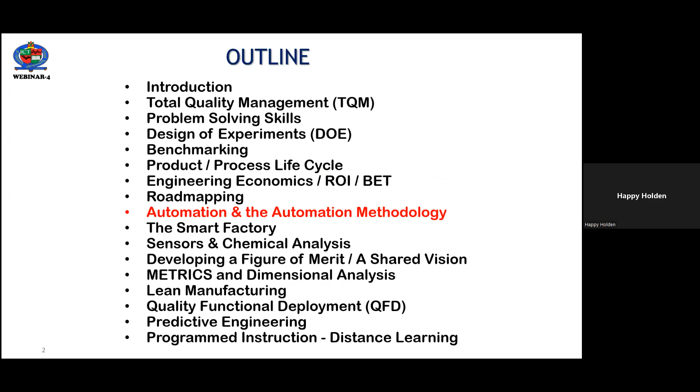Like I said, this is the 4th in our series, Automation and the Automation Methodology. This comes from the other ebook I asked you to download, Automation and Advanced Procedures in PCB Fabrication, from the 007 library, which is again free, as well as the other ebooks that we kind of use as reference for this presentation. Today I'm going to start a lot of what we call computer integrated manufacturing, because that's where I developed the automation planning methodology in terms of these 6 topics.

I want to start with the Computer and Automated System Association, CASA wheel. This was produced by SME in 1981. And if you look at that, this could be the logo for Factory 4.0, Industry 4.0, because this is what automation is all about.

Factory information, product and processes, manufacturing planning and control, being driven by strategic planning, finance, management, and marketing. But like I said, this is over 40 years old, and probably was developed before some of you may have even been born.

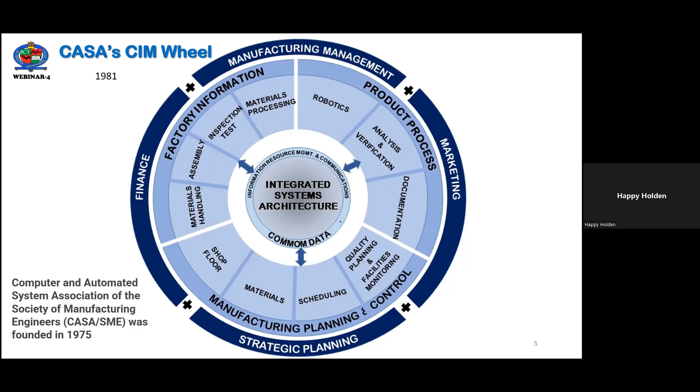The CASA part of SME was founded in 1975. Core to their computer integrated manufacturing are these 7 areas: computer-aided design, group technology, manufacturing planning and control, automated material handling, computer-aided manufacturing, robotics, and computing technology. You're probably familiar with many of them, probably not group technology.

Group technology is quite important, but somehow doesn't show up so much in this Factory 4.0, even though it's fundamental to product planning and automation. As head of the application organization in Hewlett-Packard, where we were helping companies plan their automation, group technology is a key contributor.

I spent many hours at Caterpillar Tractor and John Deere, who have some of the world's most advanced group technology, helping them implement these databases from a design methodology, because they found out that 80% of the time they were designing parts that they had already designed but had no way of knowing. By having a group technology methodology, before they started ever designing a new part or a product, they would look and see if they developed it before, and lo and behold, they may have designed it 6 times, and so they just activated the most cost-efficient, highest quality one, and the design was finished. It's very, very powerful technology, but one that you don't see talked about too much today.

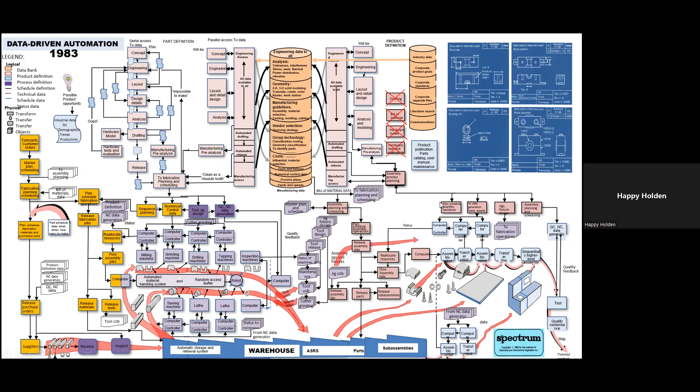But I just thought I'd throw that in to see if your eyesight's okay.

The Factory 4.0, which came out in Germany in 2012, it's been 52 years, and really nothing has changed but the buzzwords, and especially the costs. It still comes down to business fundamentals, common sense, and planning, but it's cheaper now, and you have more competition and choices.

Interesting enough, since they came up with Factory 4.0, which they tried to tell everybody was brand new, they went and changed all of the buzzwords that we had in the 80s.

So CIM evolution then became the digital factory, digitization in the cloud. The computer integrated manufacturing hierarchy became a multi-layer functional hierarchy. CIM and CAM architectures replaced with ISA-95 architecture. CIM connectivity, which 40 years ago was RS-422 or 232, now becomes Ethernet, Internet of Things, and 5G wireless type.

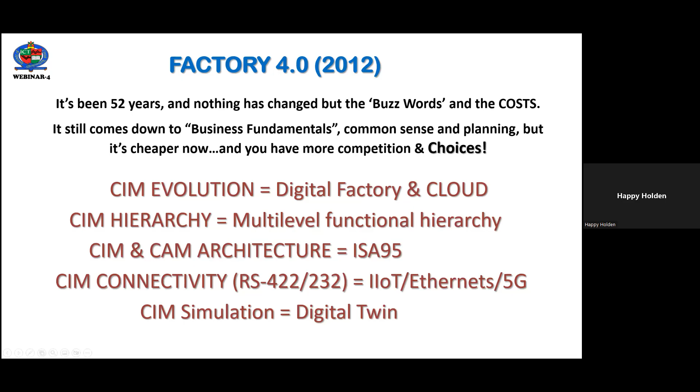And CIM simulation, which was a particular area that I focus on, now is called digital twin, interesting enough. But if you're wondering about digital twin, look up CIM simulation and software that's already existed for the last 10, 20, 30, or 40 years.

But the whole CIM process is the same as the smart factory process. It starts with planning and business planning from a strategic point of view, and then moves down through until you get to the tactical area.

If you don't do it yourself, there's management consultants, manufacturing consultants, technology consultants, automation consultants, and then the particular vendors that sell the products.

One that you may have a hard time finding is an automation consultant that knows anything about printed circuit fabrication or printed circuit assembly and box build. Which is why I emphasize that in many ways, if you take a good process engineer or product engineer in your company, it's easier to teach them the fundamentals of automation and automation planning than it is to try to find the right kind of automation consultant.

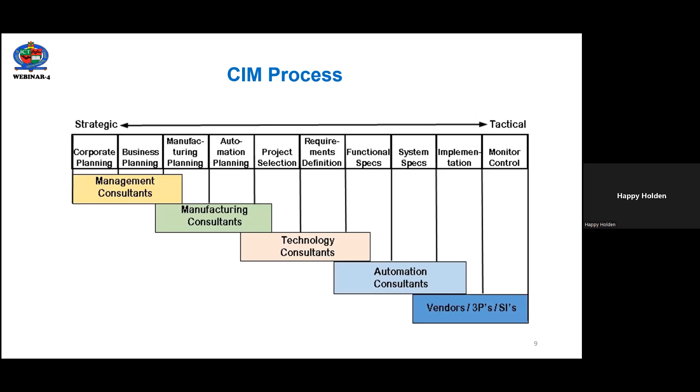So the CIM-directed manufacturing facility planning has 6 stages, from environmental assessment, which is what I've been calling your strategic business plan or performance plan, something like that, all the way through program strategies, conceptual design, detailed design, development, and then implementation.

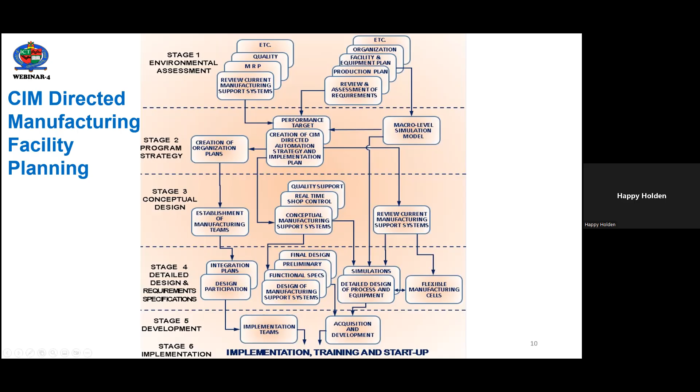This hasn't changed at all since, I've been using this for the last 40 years. The enterprise and plant topology fundamentally hasn't changed from the factory floor.

We have the device level sensors and devices and machines sitting on the factory floor. Then you have a control level that are machine coordinators and controllers. And above that, manufacturing execution systems for global operations. And above that, enterprise resource planning, ERP levels, with communication layers between each one of them.

So we'll talk more about the communication in the next lecture. This one is kind of more fundamental.

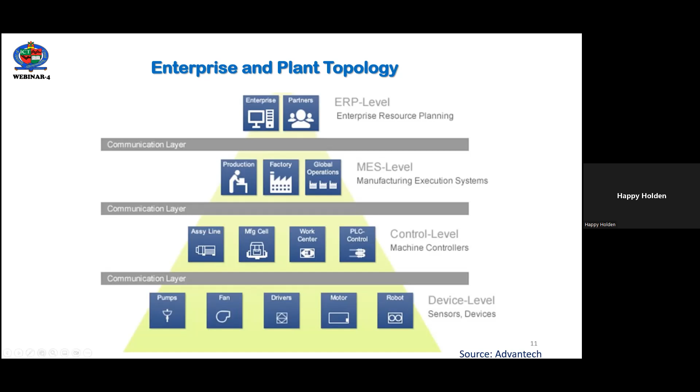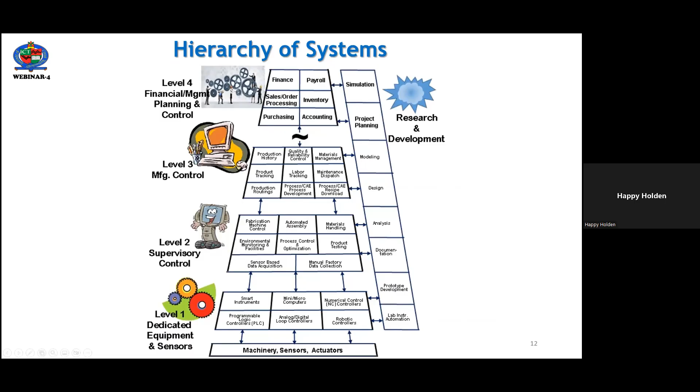So there's a hierarchy of activities and systems from the machine sensors and actuators all the way up to the smart instruments and microcomputers and NC controllers, to the supervisory control level, to the manufacturing control level, and then the financial planning, management planning and control. And then off to the sides, research and development for new processes or products that interacts with each level in the hierarchy.

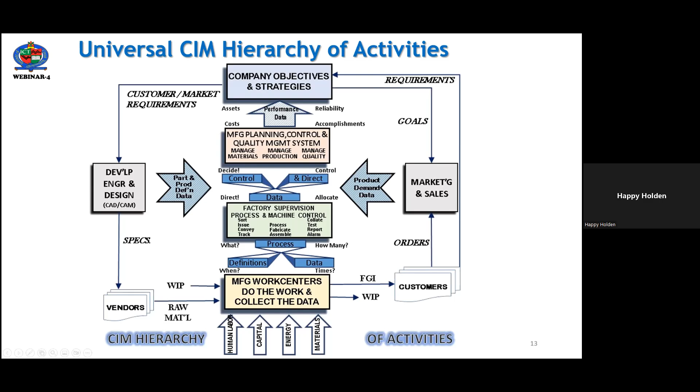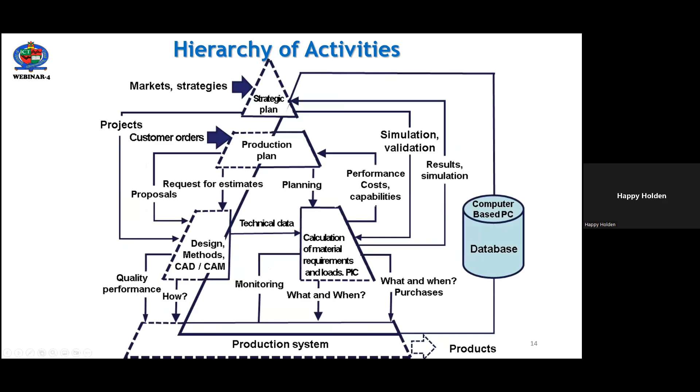Another way of looking at this is at the top is our strategic plan, as I mentioned before, the business plan that drives all of this, and then customer feedback and proposals and performance and simulations, and what and when, and quality performance and how much, and products and competitions, all fit in with the overall data requirements.

Many times the CIM solutions for this involve both the planning, the control, the monitoring, and then the systems management. And there are generic interfaces and specifications depending on the equipment, processes, devices, sensors, and material handling.

And as you see here, the protocols and the connectivity of this can be quite different. And we'll cover those in the next lecture about MAP, OML, IEEE 488, Ethernet, GEM, SECS, CFX, etc.

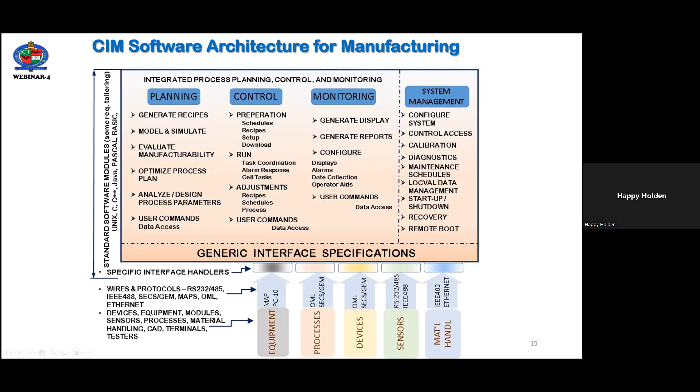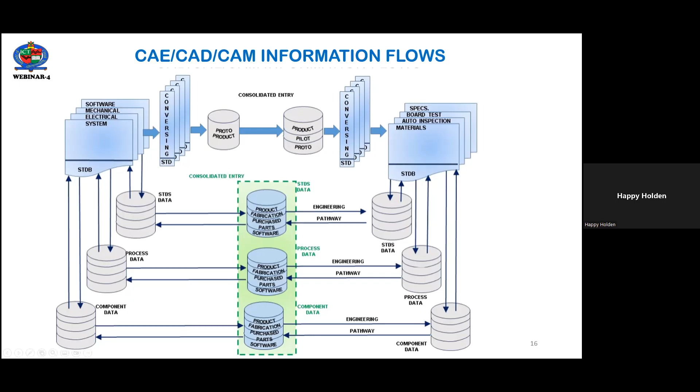Getting more into our area of CAE, CAD, and CAM, the information flows of printed circuits and assemblies involve dedicated databases and materials and systems specifically designed to handle the standards, process data, and component data that is manipulated by engineering, stored, and then provided to the factory floor whenever required.

The automation methodology for work centers - you all have process diagrams of how your products are built in terms of work centers. To simplify the planning, we looked at automation and realized it's a combination of mechanization and the systemization for that mechanization. So it's a vector.

We chose 6 levels of classes, A through F, for mechanization, and 6 levels of information, 1 through 6. We broke down what happens at a work center into these 2 levels of documentation. There are 2 additional dimensions: between work centers there's material handling for mechanization, and between information at each work center there's the role of networking.

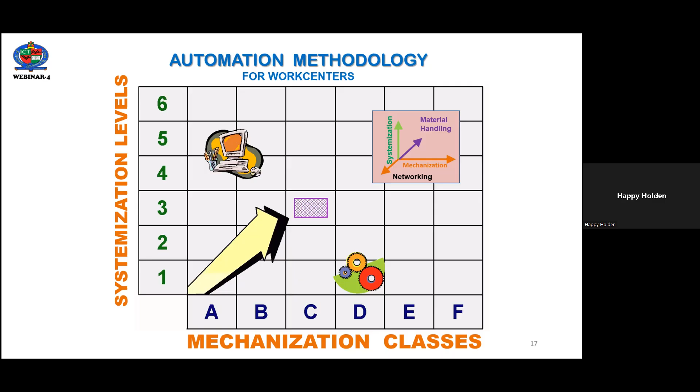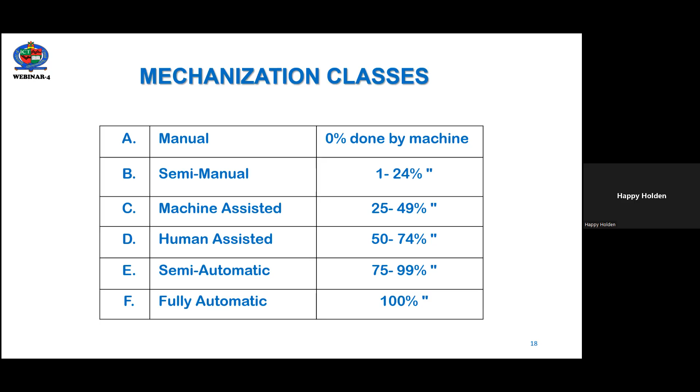Mechanization class is manual, semi-manual, machine-assisted, human-assisted, semi-automatic, and fully automatic, defined as the percent done by machine. Manual is 0% done by machine, whereas semi-manual is 1 to 24%, labeled B, all the way up to F, fully automatic, which is 100% done by machine and 0% by the human.

This describes actions conducted by the human with simple tools, actions conducted by humans with complex tools or machines, some activity shared, all the way down to F, where all actions are done by autonomous machines with minimal or no human role involved.

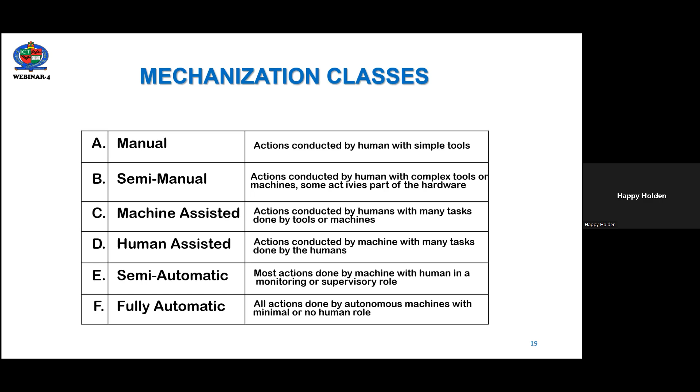The systemization levels are similarly defined. Number 1 is manual information collection and distribution, essentially distribution of paper or work center information, where an operator reads the work traveler and sets up a machine. That's 0% done by sensors or computers, all the way up to level 6, a fully automatic gateway network, where 100% is done by sensors or computer and 0% by humans.

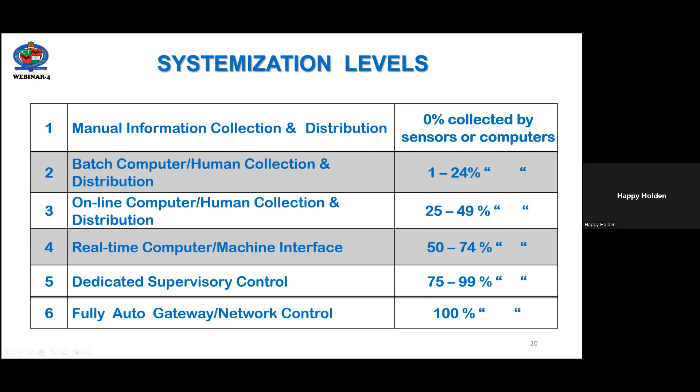The definitions include where you set parameters, record past occurrences, documents produced, including things like visual inspection, all the way down to the fully auto gateway network control, which is information management that executes a control action when predefined conditions occur.

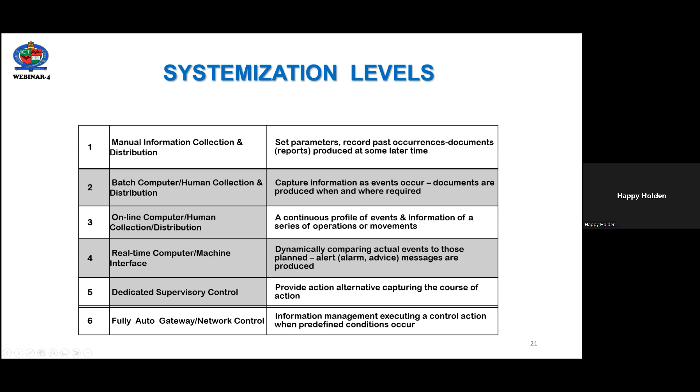So how to improve automation? Under mechanization, you many times add new equipment like loaders, unloaders, stackers, conveyors, robots, automated guided vehicles, or other carts. Whereas in systemization, you may add RFID or drill codes, barcodes, or readers with sensors through data acquisition equipment, interfacing that data acquisition to existing equipment in order to take that information and put it into the system.

A new one called inline confocal sensors is an IoT technology - a sensor you buy that can scan an entire PC board or assembly on a conveyor and be programmed to do particular measurements or other types of information and provide that back. This is not an AOI machine - it's just a sensor that could be incorporated in an AOI machine, but they're far less expensive and designed to go onto machines or conveyors, as well as white light interferometry and networking lab and production equipment.

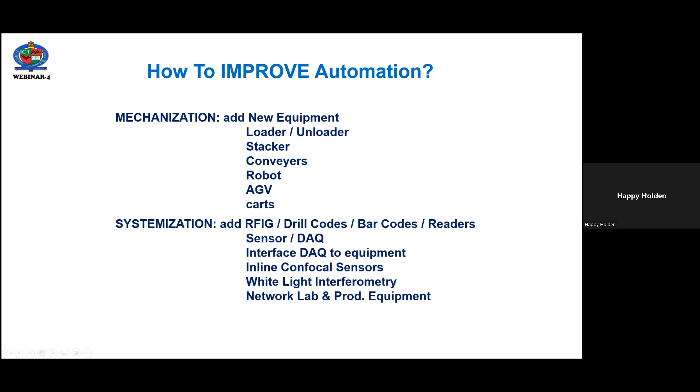So the automation strategy and planning is about breaking down your work center into individual activities, and then determining how much is done by human in terms of mechanization, and how much is done by humans or machines in terms of the information that drives that work center.

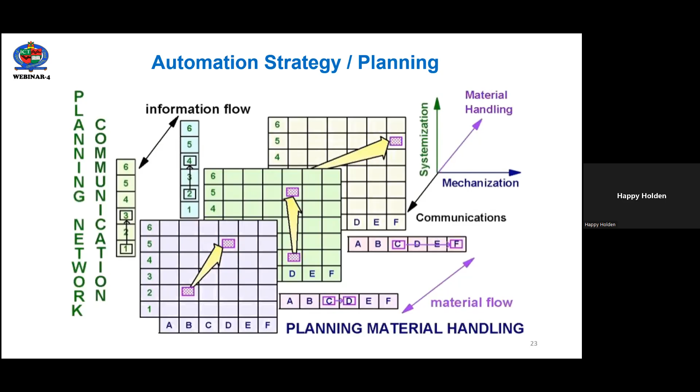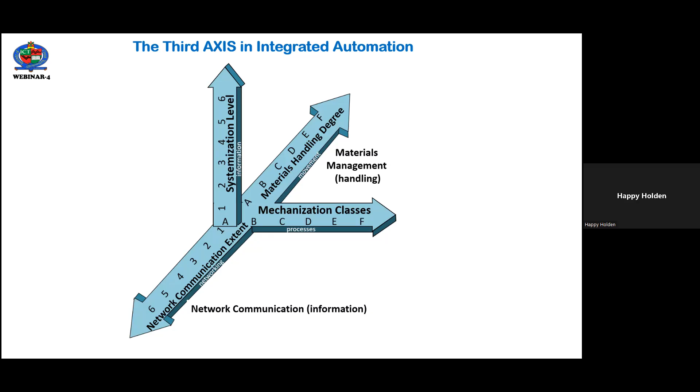Between work centers you have the material flow, and for the information flow, work center to work center. This network communication information has a systemization level, working with mechanization classes, supported by material management handling, which is degree A through F, and network communication extent 1 through 6. These are the 4 degrees that make up automation in many ways that we'll talk about today.

Part of that is breaking down the work center in terms of what you currently have, be it soldering, cleaning, touch up, in-circuit test, electroplating, etc. Then benchmarking where you are today, right now. And then looking at your plans and improvements - where do you want to be in phase 1, phase 2, or phase 3 in the future.

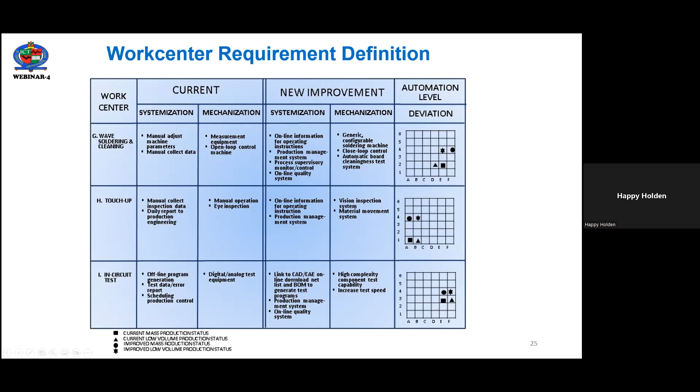We do that with worksheets that I'll get to. You can see here that it may not be possible to go from manual to a fully automated facility in one jump. Depending on where you are, your customers, what equipment you have, and the people you have, it may be one of various phases - phase 1, phase 2, and phase 3.

I've indicated here with the blue circle, red square, and the green star, as well as material handling between these work centers, and then communication extent between these work centers.

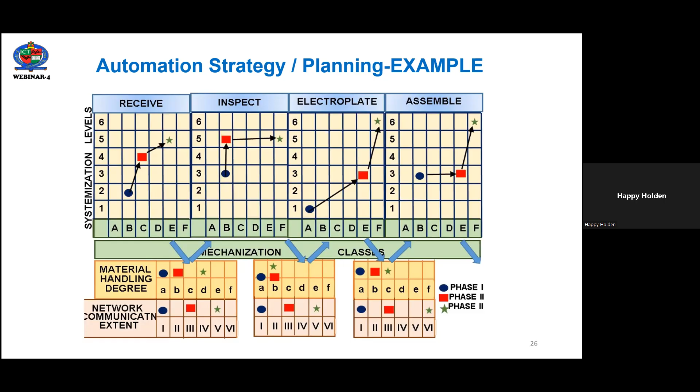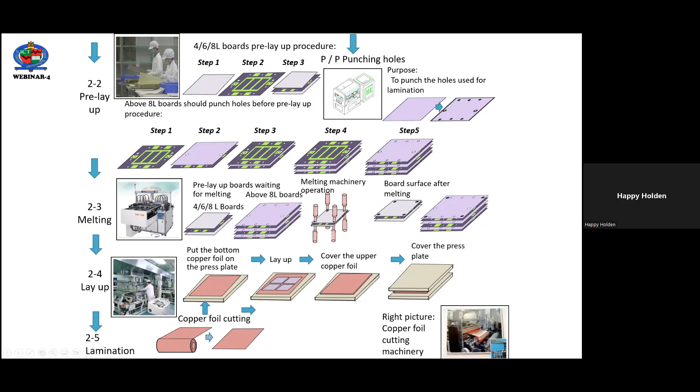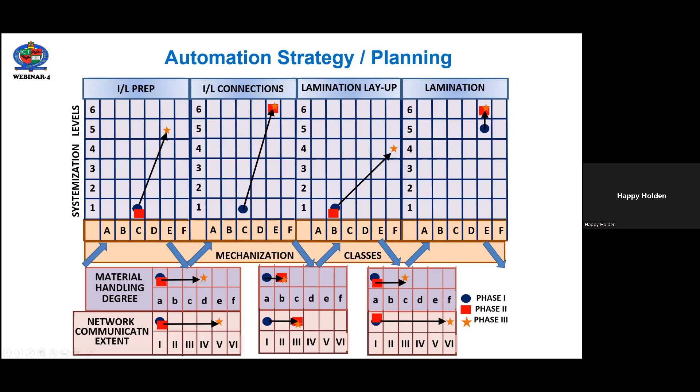Here you can see I'm talking about multilayer layup, 2.2, 2.3, 2.4, 2.5, in my process diagram. And then from that you look at benchmarking: where are we right now in terms of inner layer preparation, inner layer connections, lamination layup, and what is the material handling between each of these defined steps, and how is information passed along.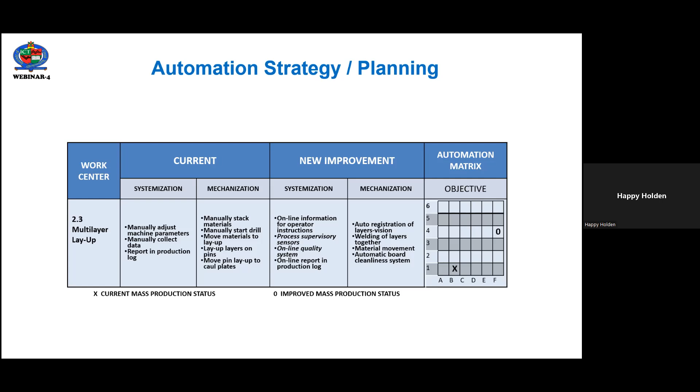This is where you start getting into automation strategy and planning, by looking at your particular work center in terms of your current state, then starting to theorize what the new improvements or the future might be, including multiple phases - phase 1, phase 2, or phase 3 - that you're looking to achieve.

I do this with a worksheet like this, where I have the process description and the process step number, and then for the mechanization classes, actually go in and time what the people are doing, including all the people. The human setup time may be 6 minutes, and we'd like to reduce that to 1 minute. The machine setup time may be 2 minutes, and in the future you'd like to get that to 1 minute. The runtime after setup, the human may put in 20 minutes, and in the future we'd like only 5 minutes, while the machine provides 12 minutes, and we'd like that to increase to 34.

So we want to go from 35% to 85%. Then the total human time, summing the setup and runtime, and the total runtime, and the mechanization class - the same thing is done for information.

If you have to read a particular work order to know what material or everything else, then the amount of time spent by the human currently, and how much you want in the future. Then summing up the total human time involved and the total runtime involved, as well as defining the material handling degree in terms of how much time is involved in actually moving the materials or the multi-layered plates between these different operations currently and what we'd like in the future.

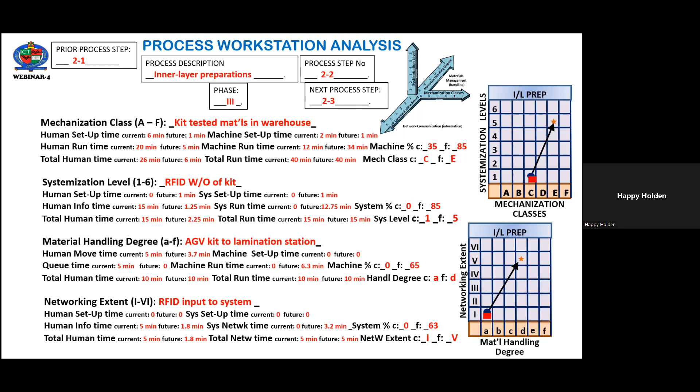How is that information conveyed - via voice, additional paperwork, logs, et cetera - and what would you like that to be in the future? Here's step 2-2 in terms of moving from mechanization class C, with basically no systemization, to mechanization class E, a fully automatic gateway system, in which you want the human time in the future to essentially be 0. Currently it's 10 minutes for the systemization level, but in the future you want it to be 0.

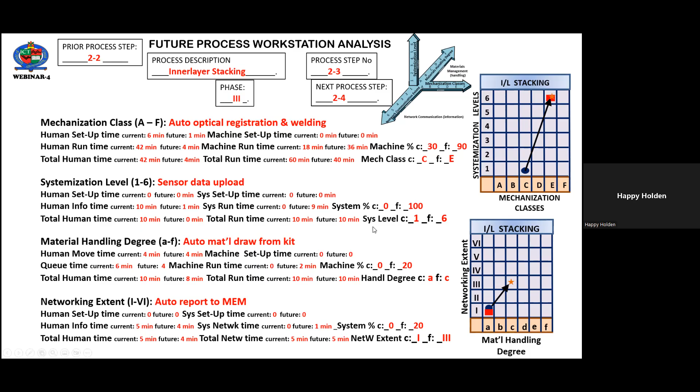As you look at the networking and material handling, this will begin to show you the extent of the projects in front of you. Further, process step 2-4, again measuring the human and machine times, the information from human and machine currently, and then what you might want in the future.

You can see that a number of these are set up for mechanization class F, going from a B, which is about semi-manual techniques, to fully automatic techniques. This may be because of new machines available currently on the market, or ideas you have to mechanize this, or provide through sensors and data acquisition the information automatically.

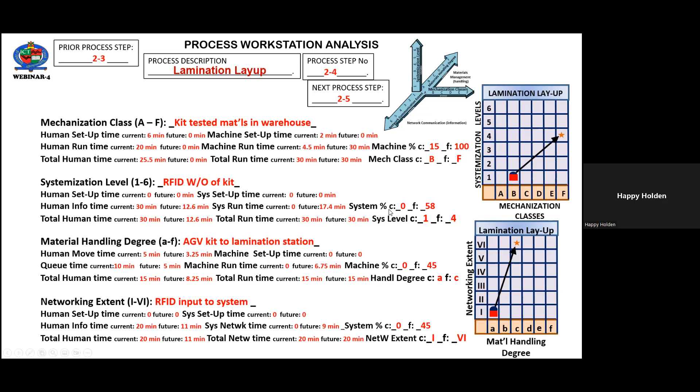Process step 2.5: here we're talking about introducing a new induction lamination vacuum press. Unlike the heated version, with this new technology every single multi-layer has its own set of caul plates, because the stainless steel separator plates through induction heat up and provide heat individually to every single multi-layer. They're all identical, and it allows precise control and precise temperature monitoring - incredibly productive, as well as using 1/50th the amount of energy involved in heating and cooling.

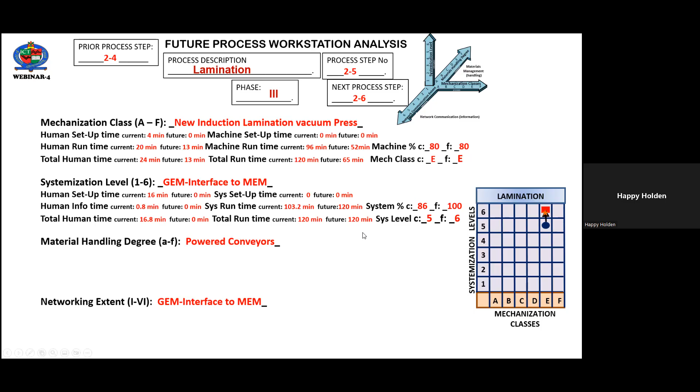Then at the systemization level, proposing the GEM interface to the management and equipment management system, and then using a powered conveyor, again with the GEM interface at the networking level. So automation strategy and planning involves a lot - it doesn't just involve the actual benchmarking of how you manufacture.

It's doing the audits and the environmental assessment based on your business plan, based on your customers, based on your materials, based on your finances, and things like that.

It's important. One of the reasons we're running this seminar now is that in the next 2 to 5 years, the entire world is focusing enormously on semiconductors and semiconductor packaging, so there's an enormous opportunity for money involved. Here in North America, our Congress passed a 200 billion technology bill. Out of that 200 billion, 50 billion is focused on semiconductor production in North America and the packaging. But part of that 50 billion and part of that 200 billion is the infrastructure of electronics in general, that is circuit board fabrication and printed circuit board assembly. As other countries begin to focus on that, there's going to be a lot of money available. So now is the time to get your ducks in order and figure out what is your business plan for the next 5 years in terms of taking advantage of this unique activity and operations.

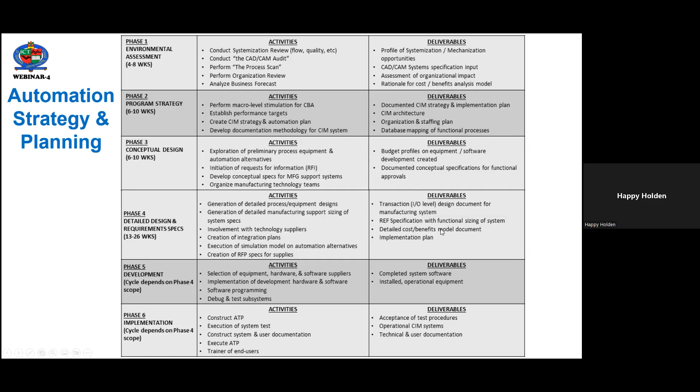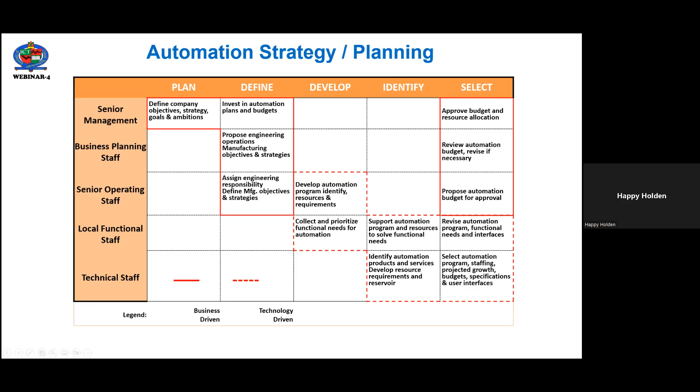So the people involved, like I say, work from senior management, the business planning staff, senior operating staff, local functional staff, and then the technical staff in terms of what is business driven in this automation strategic planning, there on planning and defining, and what is technology driven and the other things. It's a role that starts from the top down in terms of senior management, but you also need from the bottom up the engineering that's going to do the technology driven parts of automation methodology and planning. Together, you can put together quite an effective program.

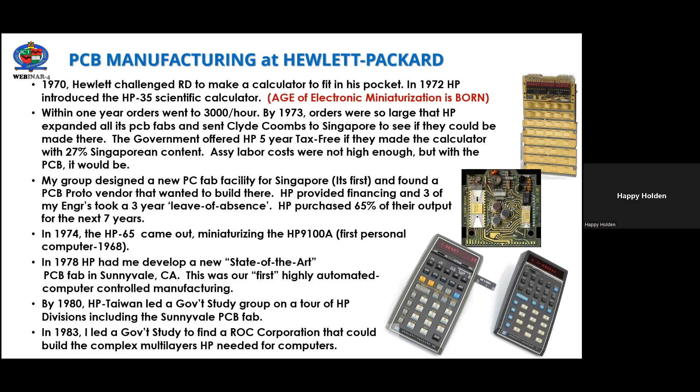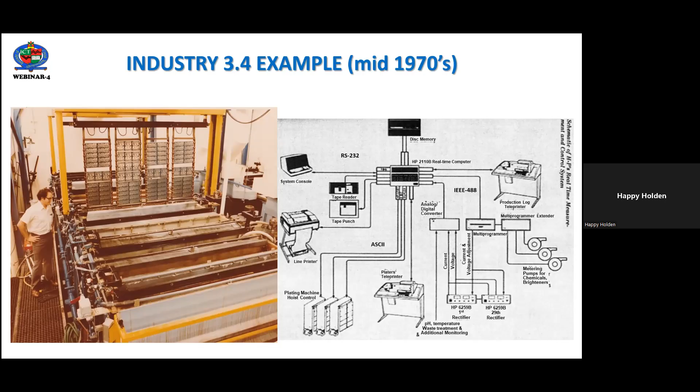So an Industry 3.4 example, from the mid '70s, was one of my first projects in terms of automating the entire electroplating process. This random input-output electroplating has 4 different final finishes you can call out, entirely driven by a barcode system, one of the first computers ever applied in electronic manufacturing, including metering pumps for chemicals and control of all the rectifiers. For Hewlett-Packard, these were 50 and 100 amp HP rectifiers, which I had to order nearly 2 years in advance to get the number required to run a large electroplating line like this.

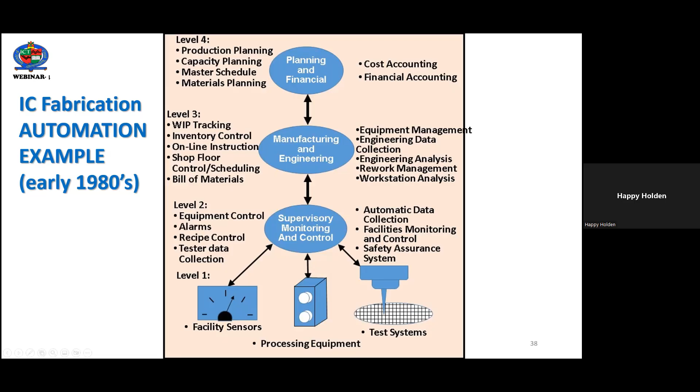At the same time, Hewlett-Packard had one of the biggest semiconductor fabrications in the world, and we started automating IC fabrication in the early 1980s — planning and control, manufacturing engineering, and supervisory monitoring and control for semiconductor manufacturing. This proved very useful because everything developed for IC fabrication automation could be used for printed circuit fabrication automation. We just changed from wafer to panel and from die to board. There are many similar photolithography, electroplating, and other activities paralleling that for circuit manufacturing.

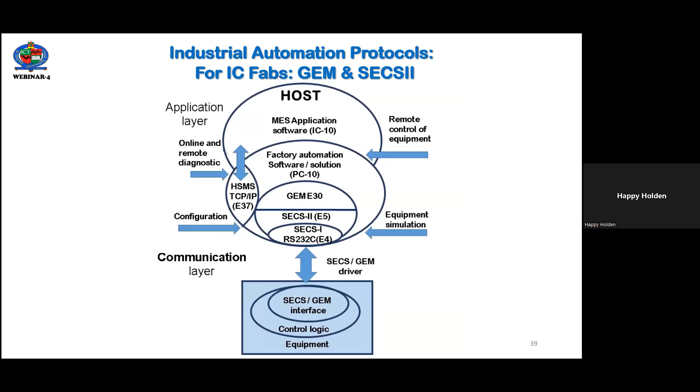With that was developed by SEMI the GEM standard of communication and protocols between the host computer and the actual equipment on the factory floor, using this SECS/GEM driver.

Because of this, in the early 80s, Hewlett-Packard created what they called the Manufacturers Productivity Network, and HP went into the business of selling automated factory solutions — operation planning and control, administrative and office services, computer-aided engineering, and factory and plant automation software. At that time, Hewlett-Packard actually had CAD system software for sale, as well as mechanical engineering software and microprocessor design software. This MPN became a major program, and I ran the application organization that provided the application services to people interested in buying this from Hewlett-Packard.

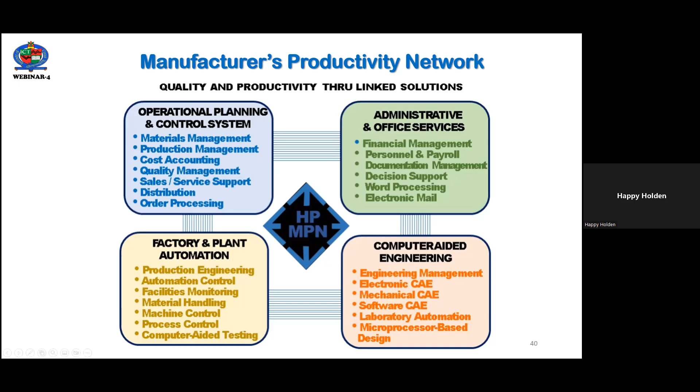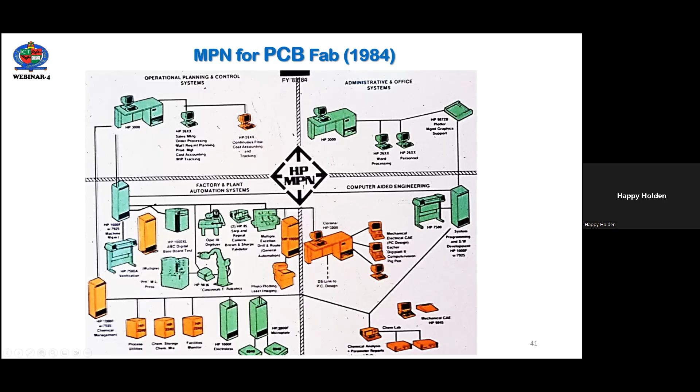You can see these are different ones — we had 6 different printed circuit fabrication facilities around the world. All of them got involved with automating the factory automation systems for printed circuit manufacturing as well as electronic assembly. We had this in Sunnyvale California, Palo Alto California, Boeblingen Germany, Boise Idaho, Puerto Rico, and Tokyo Japan, all set up through my organization — what we called Industry 3.75.

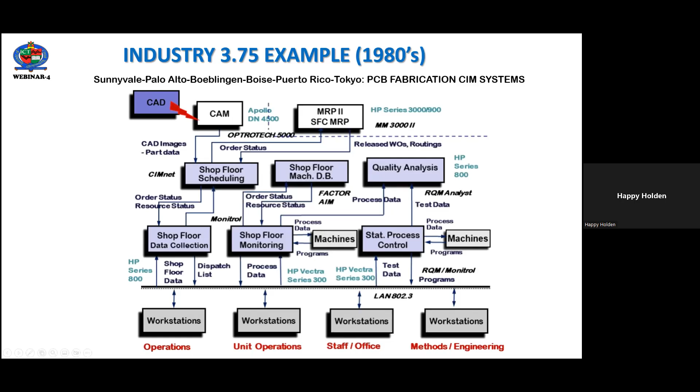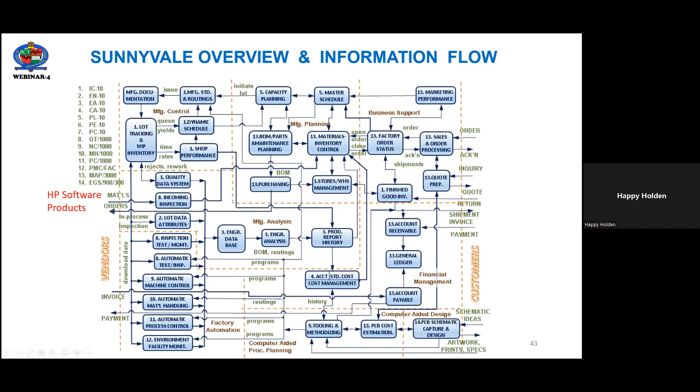This is in the 80s, using the methodologies and Hewlett-Packard computers and software, as well as a lot of custom written software, in order to have a fully integrated manufacturing system. You can see the modules here in more detail in terms of information flow, and 14 different pieces of software that Hewlett-Packard sold at the time. None of those are available today, interesting enough. But in the 80s, those were key software, and HP was one of the few vendors around the world that had such an extensive set of software for factory automation.

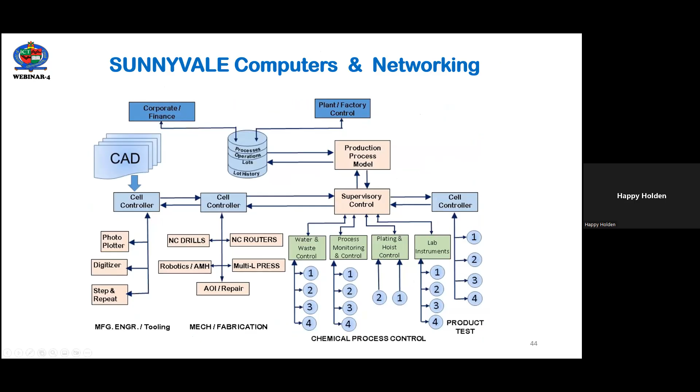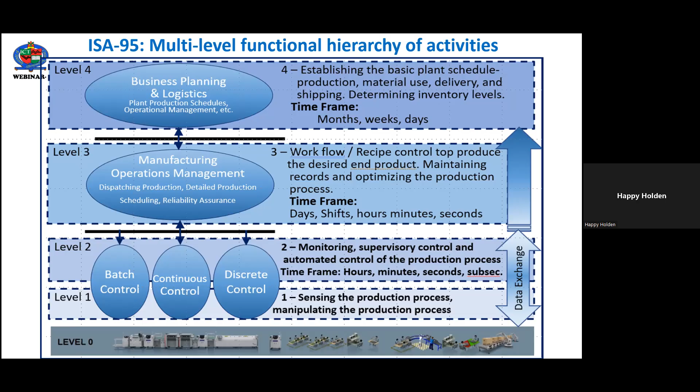When we did the Sunnyvale facility, we used the methodology of breaking things up into manufacturing, engineering, and tooling, mechanical fabrication of routers, multi-layer presses, AOI, drills, then chemical process control, and product test and AOI and electrical test methodology. At the time we didn't have this, but by 1995 the Europeans had established ISA-95, which codifies a 4-level hierarchy from sensing on the factory floor all the way up to manufacturing operations and business planning and logistics.

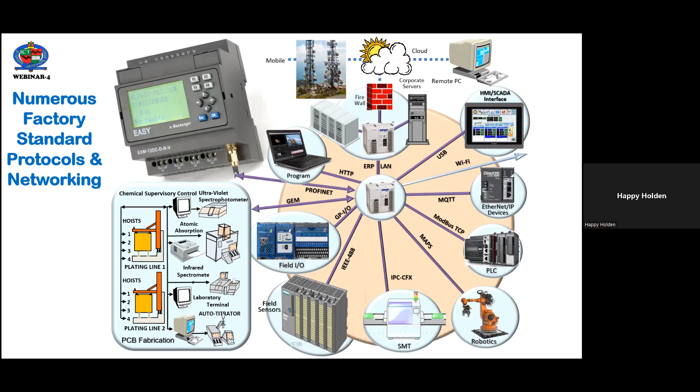There were, at the time, numerous factory standards, protocols, and networking systems. These are just some of the ones we'll talk about in the next lecture. For robotics, it was the MAP standard, but for surface mount, IPC CFX. For field sensors, it may be IEEE-488. For programmable logic controllers, it may be Profinet. On and on and on. The details will follow in the next lecture.

As well as companies starting to develop their proprietary ones — this is the Panasonic PanaCIM system, which is proprietary. It's interesting that although it's proprietary, it will take their proprietary system or the SECS/GEM standard from SEMI.

The SECS2/GEM standard was developed in the early 80s and has continued to evolve to run all wafer fabs, as well as photovoltaic manufacturing and LCD liquid crystal manufacturing. So they've had nearly 40 years to perfect software and control through the semiconductor networks.

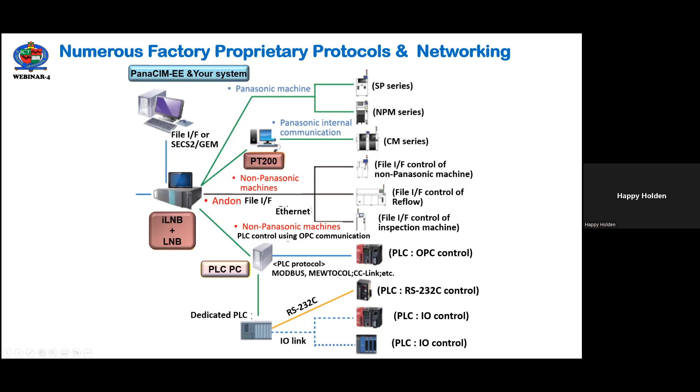One of the biggest focuses today is planned maintenance and moving towards predictive-based maintenance. If you're having more and more of this automated system, you certainly become more and more sensitive to unscheduled downtime. So predictive-based maintenance is really, really an important factor as you focus more and more on automation.

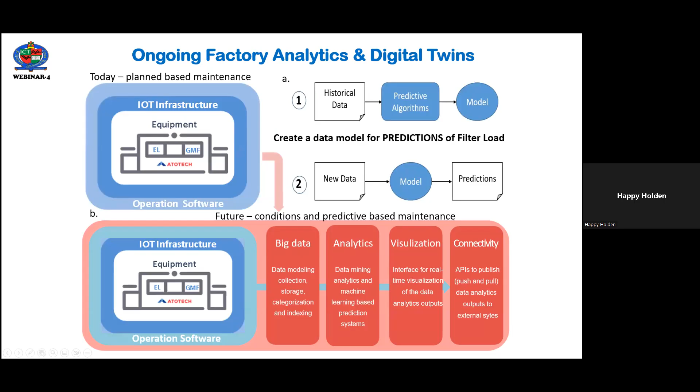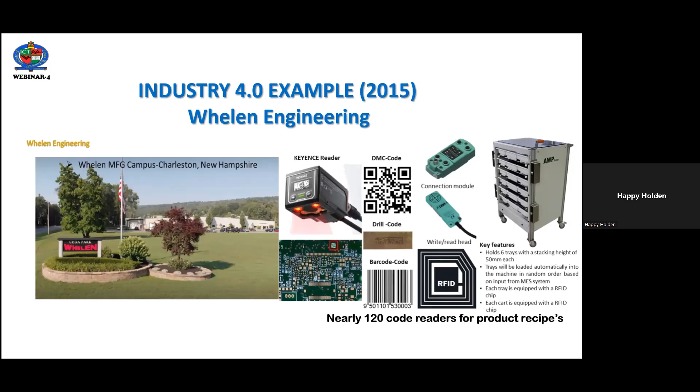As an example of this, I like to show the Industry 4.0 example of Whelen Engineering, and their facility in Charleston, New Hampshire. Whelen has a printed circuit multi-layer fabrication operation, and there are nearly 120 code readers for their products. They have a DMC code, drill code that are drilled in, and then barcodes as well as RFID devices, and then these readers all around the facility. So this is the facility that I visited, spent a whole week there in 2015 at Whelen Engineering.

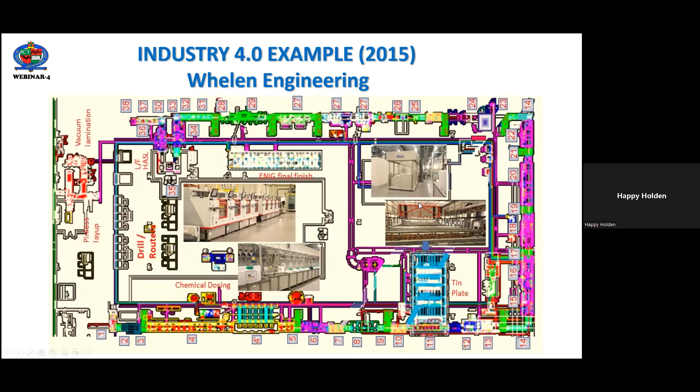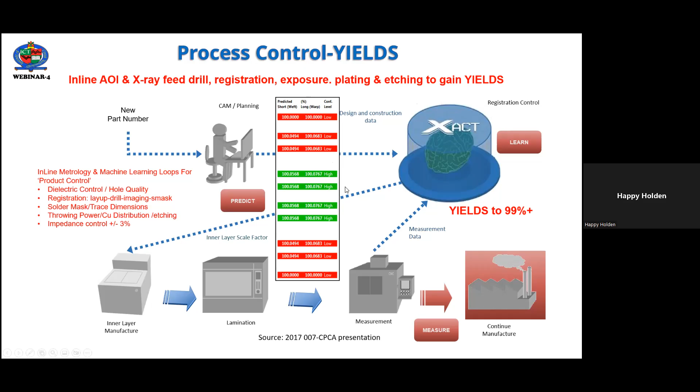You can see different shots of the facilities, multi-layer, et cetera. That's available in various iConnect007. One of the most interesting was provided by XACT there in the UK, in terms of their software that learns from AOI and other types of measurement machines, and predicts and provides measures and yield improvement, which is significant. The interesting thing about Whelen was the pilot plant, which is a 50 panel per hour facility.

It had no production operators. There were 17 technicians working on it 24/7. They had no effluent, 100% water recycling, and about 70% chemical recycling. And the copper recovery from etching is actually a profit center that pays for virtually everything else.

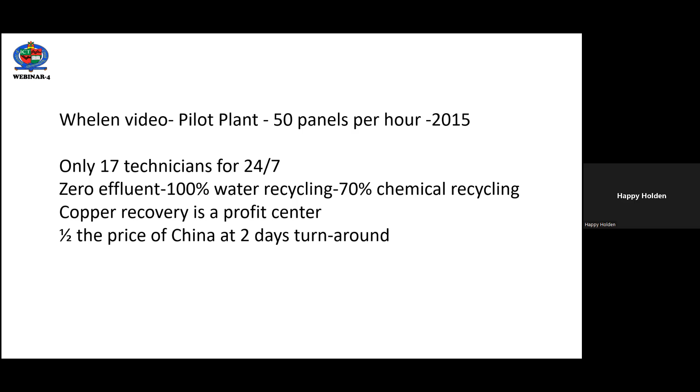And they put this together because they were making multilayers at half the price of China in 2 days instead of 12 weeks. So with that, I want to show you this just 3-minute video. When you're watching this, remember what we talked about in benchmarking, in terms of there being no setup time here. Once material is launched, there's no place for it to go. They only have about 1 hour worth of stackers you can see there. And the reason they have the stackers is they run 5 different kinds of printed circuit multilayers, flex rigid, metal core, and they run them on a random basis so that the stackers can hold them and optimize production.

But once material is launched, the multilayer is shipped in less than 5 hours. There's no place else for it to go. And so it's untouched by human hands, including no visual inspection required, because the sensors are better than human eyes are. They pretty much showed their customers that our sensors are more reliable than human eyes in terms of reliability.